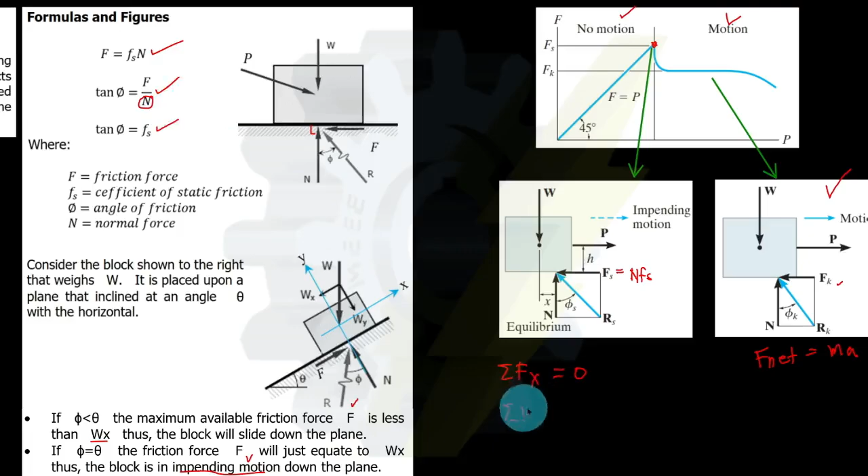So let us solve some examples. So from the book of Ferdinand Singer, page 122, problem 506. A 400 pounds block is resting on a rough horizontal surface for which the coefficient of friction is 0.4. So ilagay na natin yung coefficient of friction equal to 0.4. Minsan na ginagamit na variable dito sa F ay mu. Then, determine the force P required to cause the motion to impend.

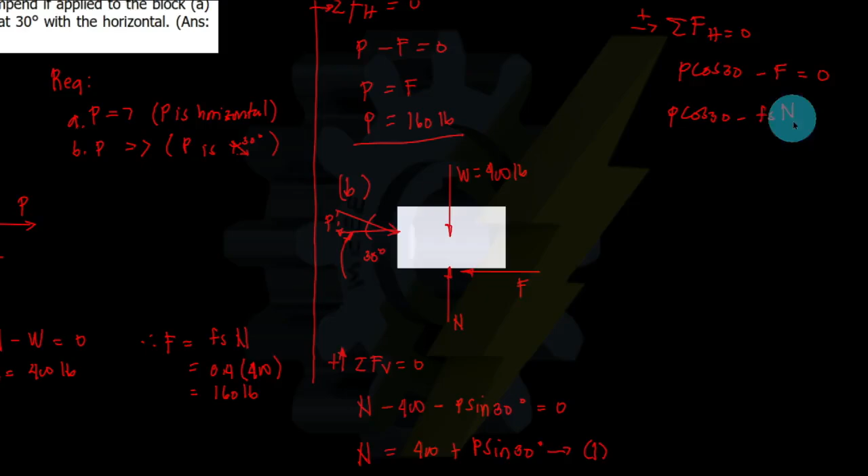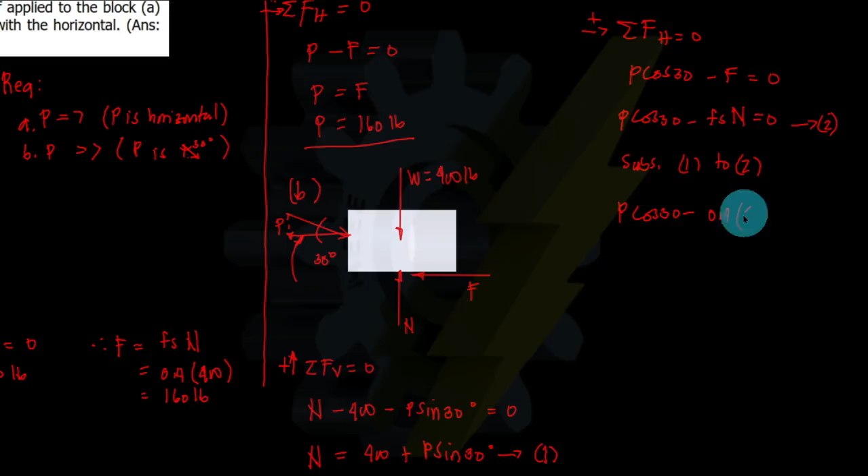So let us now substitute equation 1 to 2. Okay, kasama na rin yung ating F sub S. Palitan na rin natin yan. So yung ating F sub S ay 0.4. Then N, ito, 400 plus P sine 30, equal to 0. Okay, so we can now solve for force P. Using our calculator, you can use shift solve. Tinype natin yung lahat ng to with variable X for force P. So shift solve. Okay, so the value of force P here is 240.23.

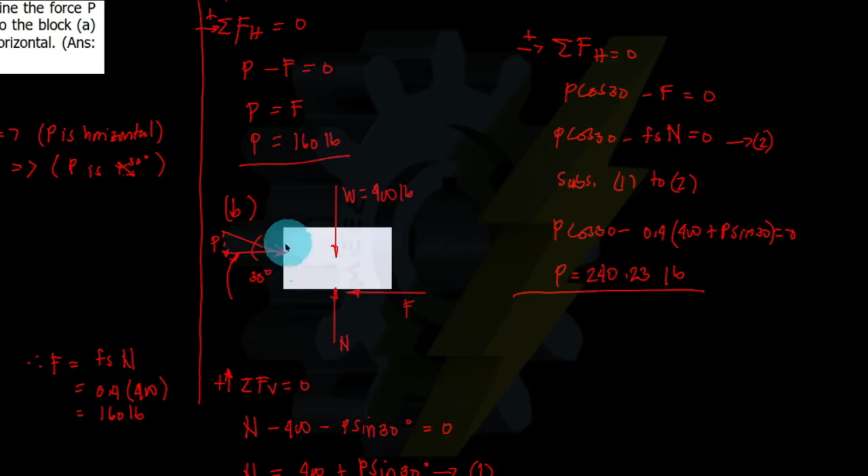Okay, so for our next problem, problem number 515 from the book of Ferdinand Singer again. So block A in figure P-515 weighs 120 pounds. Ito yung block A.

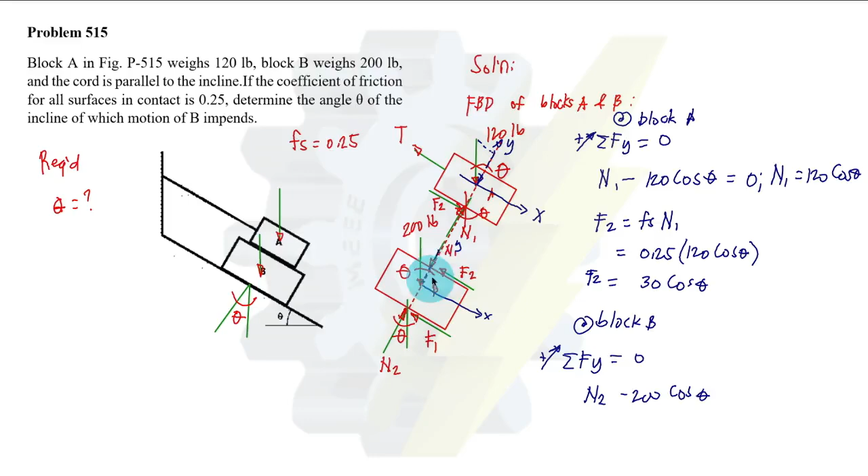N2 is here, then the component of our 200 pounds along y, which is 200 multiplied by cosine of theta. Then lastly, N1, the normal force from earlier, acts downward here, so minus N1, equal to 0. This N1 we can replace using our earlier equation.

Let's call that equation 1 from earlier. Substituting, N1 equals 120 cosine theta from equation 1. So we can write this as N2 minus 200 cosine theta minus 120 cosine of theta equal to 0.

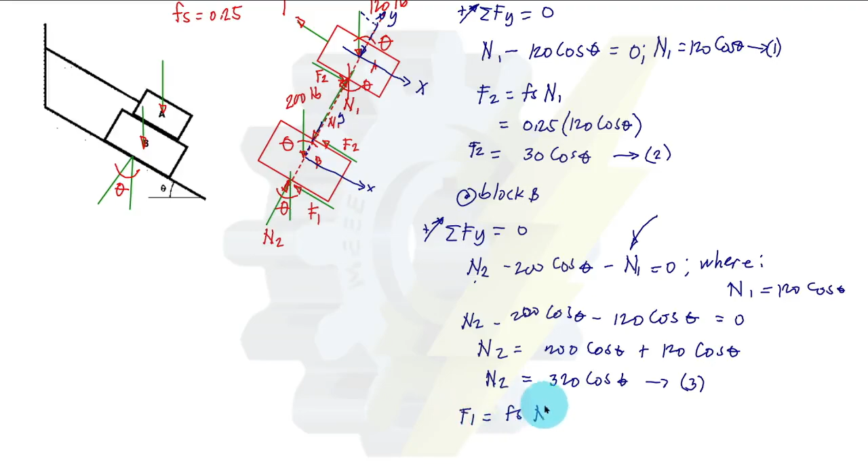Using our friction force for block B, we relate F1 to N2. F1 equals the coefficient of friction multiplied by N2, similar to before. Now substitute equation 3 into our equation for F1: F sub S, 0.25, multiplied by N2, which is 320 cosine of theta.

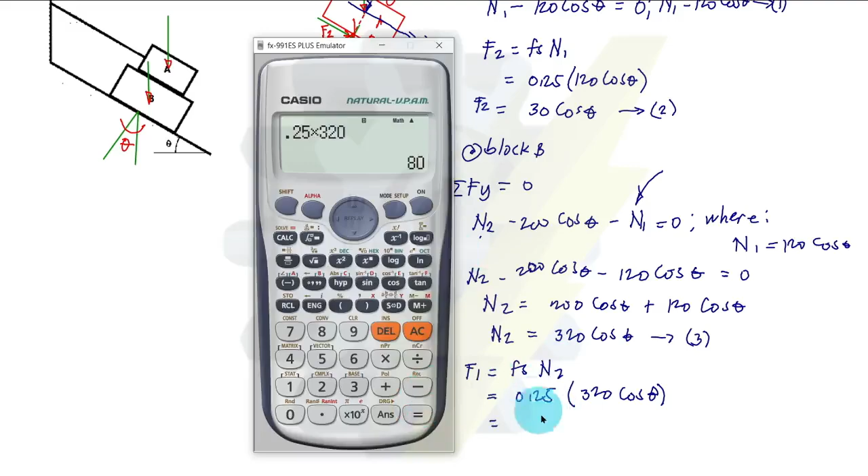For the last part of our solution, we take summation of forces along x for block B, equal to 0, assuming down to the right is positive. Down to the right, we have the component of the 200 pounds, which is 200 sine theta.

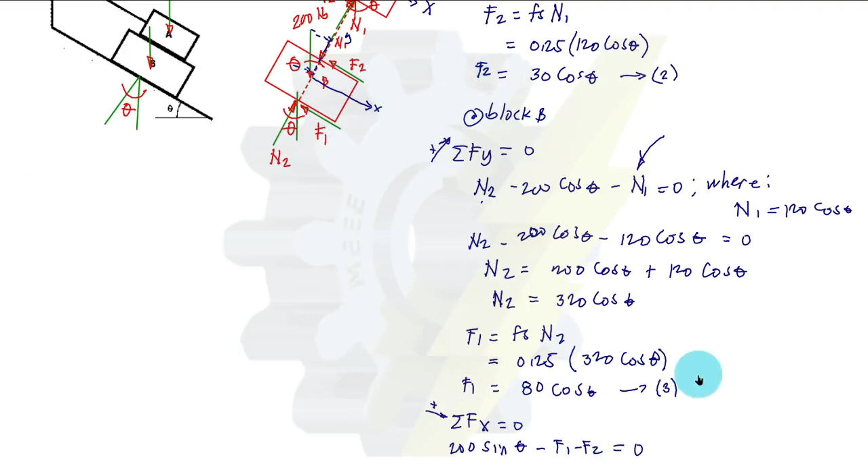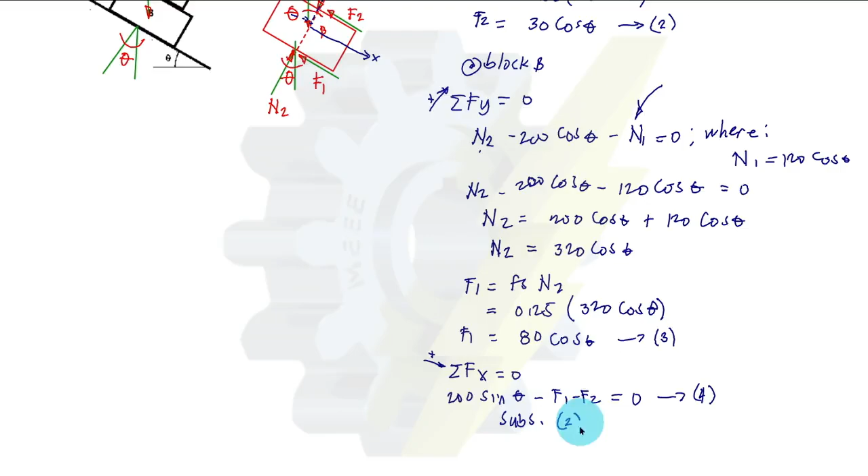For negative forces, or up to the left, we have F1 and F2, equal to 0. We can substitute F2 and F1 using equation 2 and equation 3 — let's call this equation 4, then substitute 2 and 3 into 4. So: 200 sine of theta minus F1, which is 80 cosine theta, then F2 is 30 cosine theta, equal to 0.

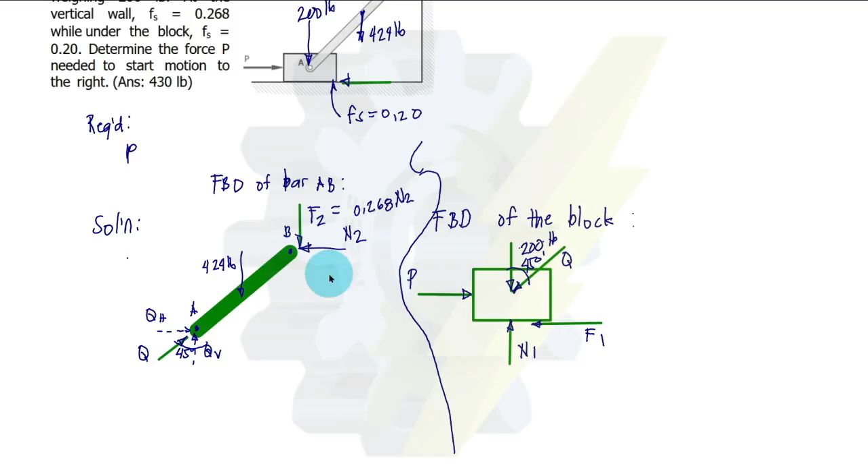So we can take a moment now to solve either N2 or F2. Let us take summation of moment at point A equal to 0, with clockwise positive. So clockwise is F2 multiplied by the moment arm, since our bar has no given length.

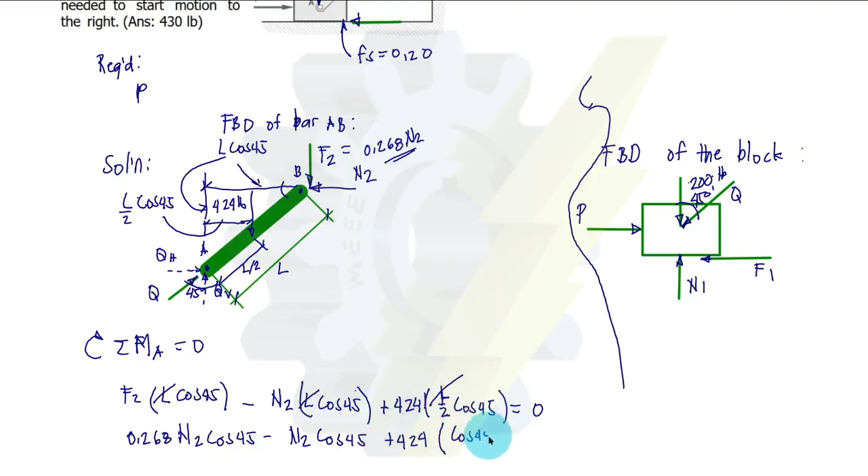So we replace F2 with 0.268 N2 cosine of 45 degrees: minus N2 cosine 45 plus 424 multiplied by cosine 45 over 2 equal to 0. Solving this using a calculator, we get N2 equal to 289.62.

From that we can now solve for the friction force F2, which is equal to 0.268 multiplied by 289.62. So this is equal to 77.62.

From that we can solve for Q sub H and Q sub V. For Q sub V, take summation of forces vertical equal to 0, upward forces positive. So we have Q sub V, then the negative downward forces are the 424 weight and the friction force F2 which is 77.62, equal to 0. Solving gives Q sub V equal to 501.62.

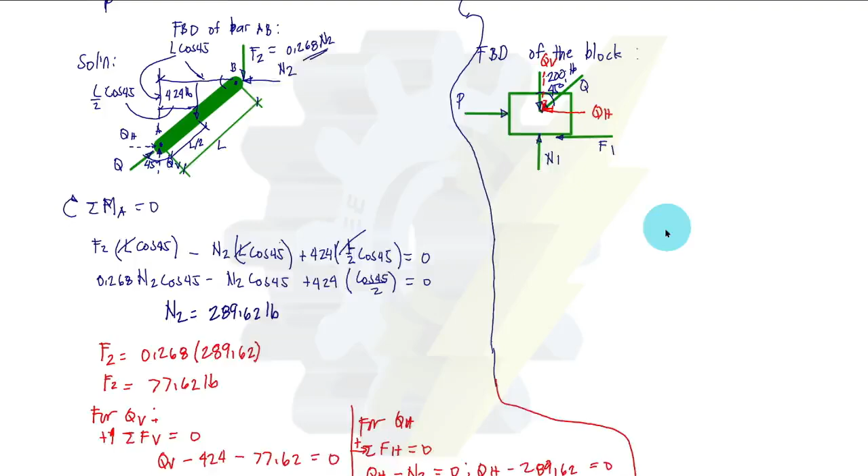For Q sub H, take summation of forces horizontal equal to 0, to the right positive: Q sub H and N2 equal to 0. So Q sub H equals N2 which is 289.62, giving Q sub H minus 289.62 equal to 0, so this is 289.62 pounds. Now we can consider the FBD of our block to solve for force P.

So Q sub H we know is 289.62 pounds and Q sub V is 501.62. Let's do N1 first since if we do summation of forces horizontal right away, we'll also need the friction force, which uses 0.2 as the coefficient of friction on the block, multiplied by N1. So let's solve N1 first.

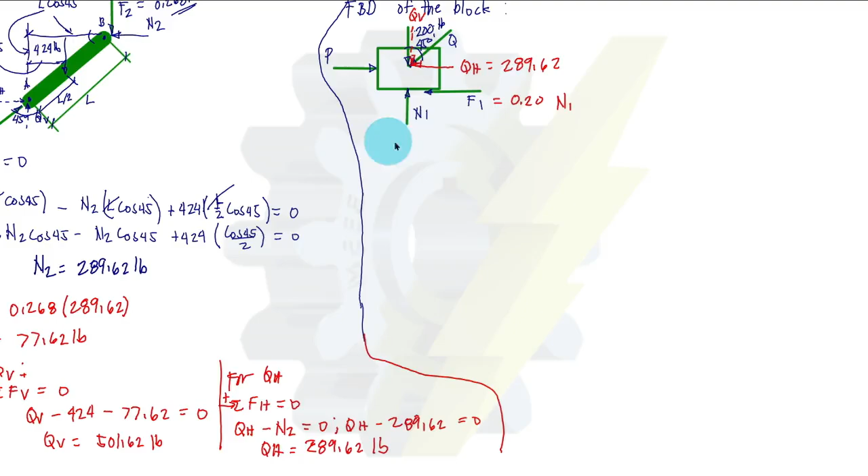Summation of forces vertical equal to 0, upward forces positive. N1 is positive, and negative are Q sub V and the weight. So the weight is 200 minus Q sub V which is 501.62 equal to 0. So N1 is equal to 701.62 pounds.

Now we can solve for F1, which is equal to 0.2 multiplied by 701.62 pounds, so this is equal to 140.32 pounds.

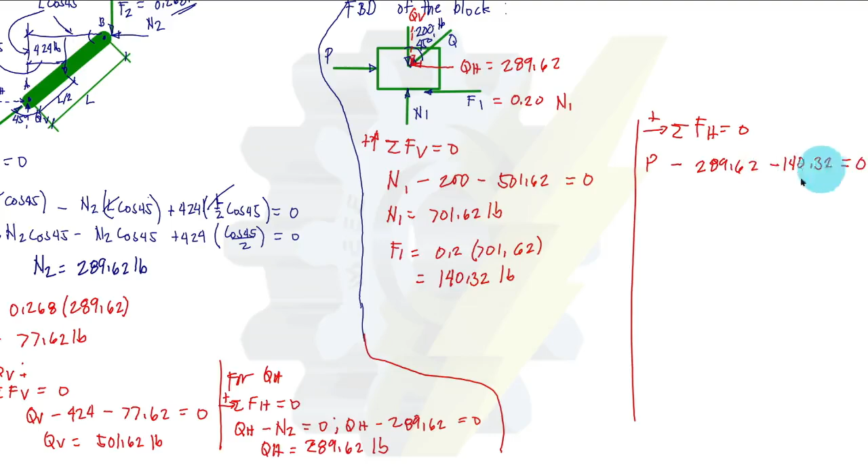Now we can solve for force P. Take summation of forces horizontal equal to 0. We have force P to the right positive, so P minus Q sub H which is 289.62, and then our friction force F1 which is 140.32, equal to 0. Adding 140.32, we get 429.94 for force P, or approximately 430 pounds.